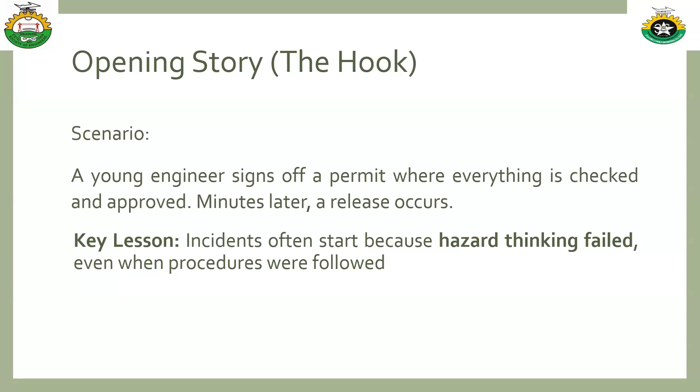So the objective of today's section: generally we'll be talking about distinguishing the difference between process safety and personal safety. We'll also talk about how to identify hazard in the real world system. We would also be training ourselves on how to apply basic hazard techniques like HAZOP, bow tie, and also adopt the mindset of a safety professional.

Most times, most of us believe safety is not everybody's business. Some people believe safety is just about the safety professionals themselves. I want us to know that today we are going to differentiate between personal and process safety, and master the bow tie mindset, and look at why some of the biggest names in the industry still suffered catastrophic failure. Some people believe anything about safety is only for safety professionals alone.

But truth be told, everybody has to take ownership. So we need to move from the stage where we think we are just complying with safety, to now talking about the ownership of safety.

So at the end of this section, I want us to be able to think like a risk engineer, and we should be able to identify hidden hazard, apply systemic analysis tools, and prevent catastrophic failures. And I believe, hopefully, all things being equal, that by the end of this training you will leave here with only one thing: for you to start thinking in hazard. So hope you are ready for me.

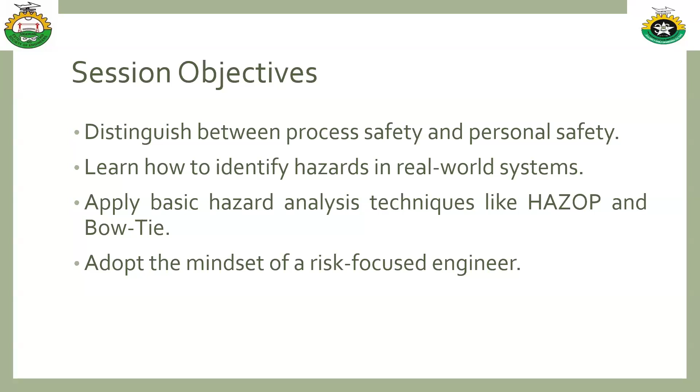So let's start with what is process safety. Process safety is not about slip and trip. Most times when we're talking about hazard, most people think safety is all about slip, trip and fall, work at height, hazard of trip and fall, fall of objects from height. Those are not just safety when we talk about process safety. Majorly, those are personal safety. So process safety is not about slip and trips.

It is about catastrophe, low frequency events that destroy facilities and lives. Unlike personal safety, where we talk majorly about slip, trip, PPE, those are not applicable when we're talking about process safety. Process safety talks more about system failure, equipment design, engineering control. Process safety focuses on catastrophic and low frequency events, because zero injury doesn't mean safety.

Most of us believe that so far there's no injury, if you carry out the job and nobody got injured, then we are all safe. No, you might not be safe if your process safety is not in place, because at the end of everything, you might have zero injury and still have a case of people sitting on a very big disaster.

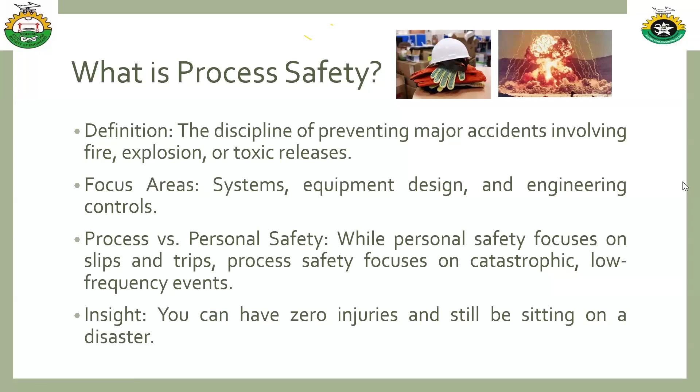But it's because there had been an error in your design. That is the reason why that happened, because you've not put in place systems or alarms that can help you to monitor when there is high temperature, or when there is thermal runaway. So all these things are what we are talking about when it comes to process safety.

So the difference between process and personal safety: personal safety is talking about you personally, but process safety is talking about the process. A very good example is someone cooking jollof rice. If you are cooking jollof rice, what you are thinking about when it comes to personal safety is how you personally will get hurt. Can you get burned when you are cooking? Can you have cuts when you are slicing? Those are personal safety.

But when we're talking about process safety, we are looking inward. What could happen to the gas cooker and the gas cylinder, is it corrosive? What systems are in place, or emergency buttons, or emergency controls in place in case there is a gas leakage? Those are when we are talking about process and not just personal safety. Personal safety is thinking about cut hazards when using a knife, ejection hazards, and all those things. That's when you're talking about personal. But in terms of process, you are looking inward into the process of how that thing is being done, for you to be able to identify what could go wrong.

And if you could work more on process safety, the chances of a hazard or an accident occurring are always very, very slim. So now this leads us to defining hazard and risks. This takes us to defining hazard and risk. Am I still audible, please?

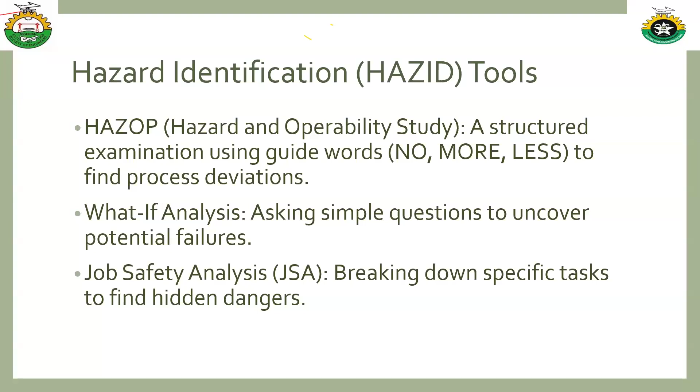Even though HAZOP uses some guide words, which we'll be talking about in the next slide. So HAZOP generally stands for hazard and operability studies. It is a structured, systematic, and team-based technique used to identify potential hazard and operability problems in a process plant, system, or procedure before they cause an incident.

So generally, what HAZOP is trying to achieve is for you to be able to look inward. It is a technique for you to identify potential hazards that will affect the process, the system. And majorly, I overheard the NSE Ikeja chairman speaking about safety in design. So HAZOP starts from the planning stage, even before you start the installation project, you need to carry out your HAZOP.

HAZOP was developed by the Imperial Chemical Industries in the 1960s and has since become the gold standard for process hazard analysis across the energy, chemical, oil and gas, and pharmaceutical industries.

I want us to know the core philosophy behind HAZOP, because even though it is simple, it is very, very powerful. Most accidents don't happen because people are careless. They happen because something in the process deviated, and that is what HAZOP is going to be teaching us, because HAZOP speaks more to deviations.

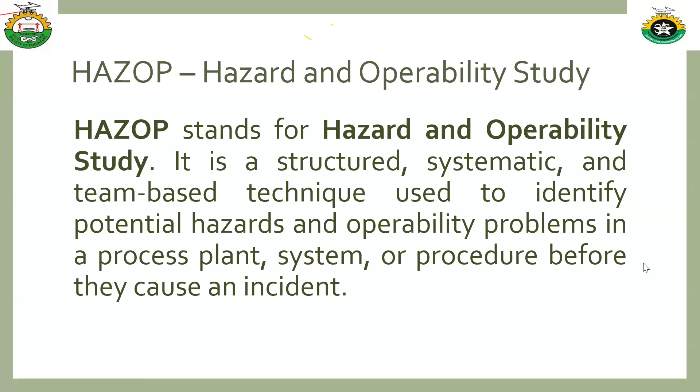Knowing this, HAZOP forces a team to systematically ask: what if this process doesn't behave exactly as designed? So that is the question we ask ourselves. What if this process doesn't go the way we plan to design it? Because you might be planning how you plan to design and execute it, but by the end of everything, at the execution stage, it ends up failing.

Now we are getting there. So how do we conduct HAZOP? The question is, when is a HAZOP conducted? HAZOP is typically carried out at these 5 stages.

Number 1, the first stage HAZOP is carried out is during the design stage, that is before the plant is built at all. During this period, when you are still in the planning stage, you try to identify and eliminate the hazard as early as possible. Trust me, the cheapest way of fixing or eliminating a hazard is during the design stage. This is not only applicable to those of us in the oil and gas sector, or in the process and manufacturing sector, it's also applicable to those in the construction sector.

That is why we talk about safety in design. In the course of designing, you should start thinking about how to eliminate hazards during execution, while you are designing your project or designing the building. That is why a lot of people end up losing a lot of funds, because they didn't put safety in design into place. They didn't think about what they could do in case of maintenance, or how they would manage it in case of maintenance. At the end of everything, they start destroying walls, breaking things, which costs them more because they didn't put all this in place during the design stage.

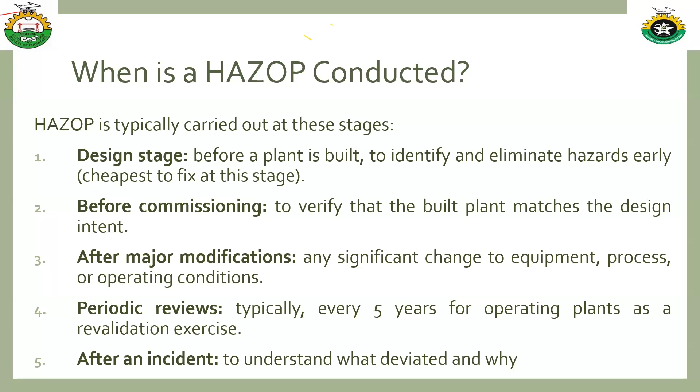So how do we build the building blocks of HAZOP? Many people have heard me using words like design intent, deviation, and so on. I want us to understand that in HAZOP, you must understand 3 key fundamental concepts. Number 1: design intent - that is the intention of the design, what you want that design to achieve.

The design - why was that thing designed? What do you want that design to look like? The picture of what the design wants to look like. It's just like someone who wants to build a house - that's what an architect does. An architect will first build a caricature model of the house, a 3D, 4D, or 5D model depending on the technology they're using. That is the design intent - how you want the building to be after it has been fully constructed.

So this is what the process is supposed to be - this is what you intend the design to be. Now, for example, pump 101: you want it to transfer liquid from tank A to reactor B at a flow rate. Look at the watchword.

You are designing a pump, and you want that pump to be able to flow at the rate of 15 meter cube per hour, at the pressure of 2 bar. That is the rate you want the liquid to be transferred. So the design intent is the baseline, the foundation of what you want to construct, the foundation of what you want to do. In ISO, we call it scope. That is the scope of what you want it to cover, scope of what you want that thing to do. So design intent is what you want it to aim, what you want that thing to be like.

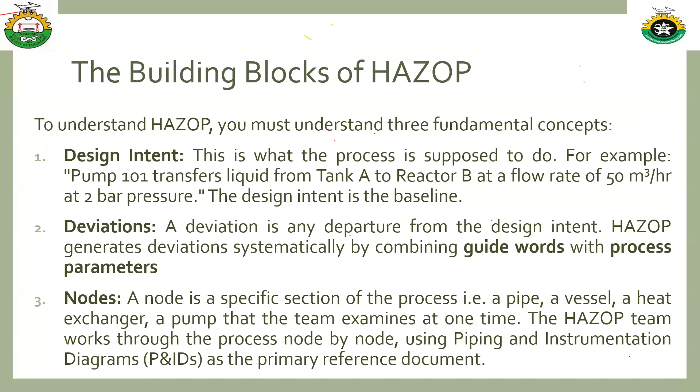Now, for instance, let's assume at the end of the design, the pressure is now higher than the 50 meter cube per hour at 2 bar pressure that we planned. So we'll be hearing more pressure, right? That is now more. Let's assume it is lower, less pressure, that is, it is now below what we planned to design initially, as well as something additional is present, that is, there is a contamination.

As well as part of, reverse, other than — we have a lot of guide words like that, but these are the standard guide words that we'll be using in the course of this training.

So common process parameters include flow, pressure, temperature, level, composition, viscosity, reaction, pH, time, speed, voltage, and signal.

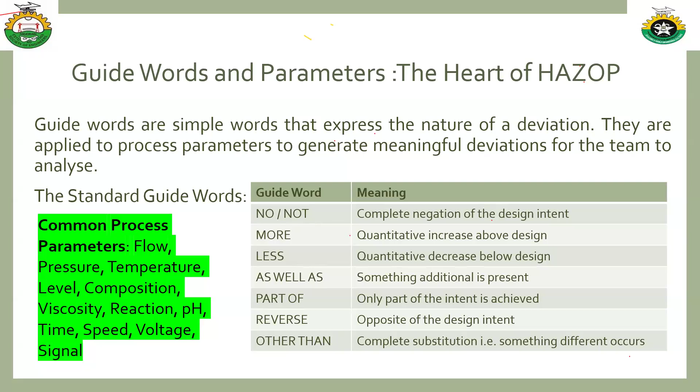Now, how do we combine these guide words? For the combination of the guide words and parameter, you take a guide word and apply it to each parameter. Now look at this — I was saying something earlier about the example of 50 meter cube per hour at 2 bar pressure, which I mentioned earlier. Now look at this guide word.

More plus flow means high flow. I mentioned nodes earlier — a node can be a pipe, a vessel, and so on. So let's assume the node we're analyzing is a pipeline. You get what I'm trying to say? Then we'll say, okay, more flow in the pipeline — it means high flow rate in the pipeline. That is the design intent. The flow is now above the flow we projected in the design intent.

No flow means no flow at all — that is, the pump has failed or the valve has been closed. Less temperature, low temperature in the reactor. Reverse flow, that is, there's a backflow into the upstream vessel. Now, for the reverse flow, the node we are using here is what? Vessel.

Now I want us to do something so that we'll understand very well. More flow, high flow rate in the pipeline — so what is the guide word? What is the parameter? What is the node we are using here? I'll call someone randomly.

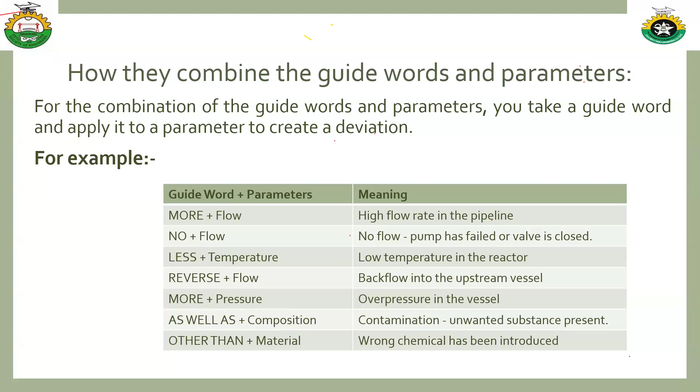That is, you are trying to check if that existing safeguard is sufficient for the risks you've identified. Then if the risk is not acceptable with the existing safeguard, you start thinking of what additional control measures you can put in place.

So every finding, after you've identified your deviations, analyzed the risks, identified what causes the deviation, the consequences, the safeguards you've put in place, the risk rating, the recommendations and the action, you now put it in your worksheet, which is always in tabular form, so every finding you've gotten will be recorded in a structured worksheet.

This is the backbone of the HAZOP study. A typical HAZOP worksheet has this column: it has the column for node. I think you all understand how to identify the node.

It has the column for parameter, when I was talking about flow, pressure, temperature, viscosity, and so on. It also has the column for guide word: no, more, less, as well as, and so on and so forth.

It has the column for deviation. When we say more flow, that is high flow; more pressure, that is over pressure or high pressure. Do you get? That is the deviation. It has the column for deviation.

It has the column for causes — this is when you start analyzing what caused that deviation. It also has the column for consequences: what are the consequences if these deviations are not being managed?

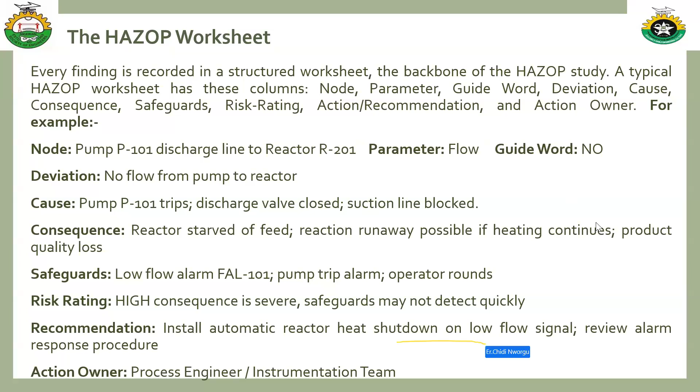So we move on to the next phase, which is talking about the simple hazard thinking model. I mentioned earlier that we have different types of hazard tools, and one of them is the what-if analysis. The what-if analysis is one of the simple hazard thinking models, and I believe engineers should consistently ask these three questions. What are the questions?

The questions are: what can go wrong? What are the consequences? And what control exists? What can go wrong? What are the consequences? And what control exists?

When we're talking about what can go wrong, that is what can happen, you understand? What are the consequences? We are talking about what will happen next, when the thing that we project to happen has happened. So what is going to happen next? That is the consequences. And when we talk about the control, what are the things that can stop it?

What are the things that can stop it? Like the example I gave, when someone is driving at high speed, what can go wrong? I can lose control. Do you understand what I'm trying to say? That is, I can lose control.

And with the look of things, what can go wrong? In the course of losing control, my brake can fail. So what are the consequences of that brake failing? Do you get? There can be even fatality, that is, the person who is driving can die. So what are the control measures that we put in place? That is when we're talking about the airbag and the seat belt.

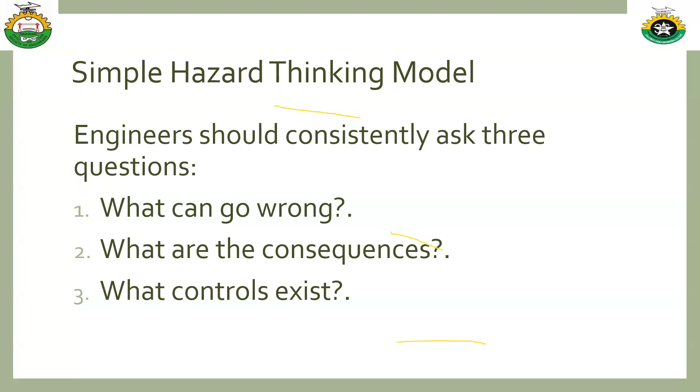So note, if you ask these three questions consistently, you will prevent most incidents. I repeat, if you ask these three questions consistently, you will prevent most incidents.

So now let's go to hierarchy of control. This one I want us to always know: the hierarchy of control plays a major role in our planning stage. It plays a major role whenever we are using any of our hazard identification tools. And most especially, the best of it all is to always ensure we use elimination — we should try as much as possible to see if we can remove the hazard completely.

So engineers must apply controls in this order of effectiveness. The best of it all, when you design a solution, always remember the hierarchy of control. Number one, elimination — removing the hazard entirely. Substitution — replacing a hazardous material with a safer one.

Engineering control — using relief valves or shutdown systems to redesign the flow, to stop the flow, or to put a stop to what failed. Those are the engineering controls. Administrative controls, speaking to the procedures and the training. The PPE, which is always the last line of defense and not the first.

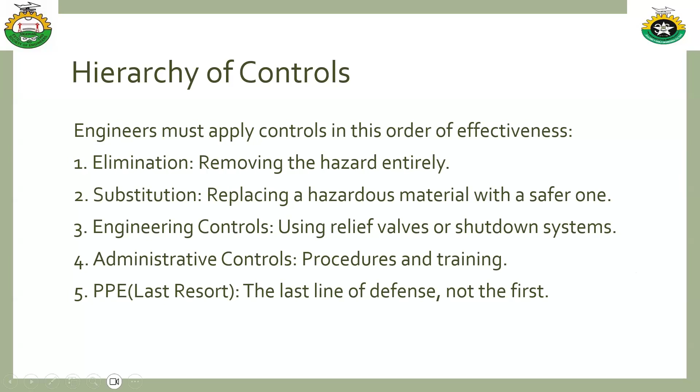Now let's go to this scenario. A contractor needs to perform welding hot work within 15 meters of a live gas pipeline. Now, this is the task, the classwork, all of us want to do now, based on the knowledge of the hierarchy of control I just finished talking about. So let's rank these controls from the most effective to the least effective.

Number one, providing the welder with a fire retardant suit. Number two, using a continuous gas detector. Number three, shutting down and purging the line. And number four, signing a hot work permit.

Now let's line it up according to rank, from the most effective to the least effective. I'll be in the chat box watching out for the correct order. So which is the most effective to the least effective? Yeah, great, I can see someone already getting it. I need more responses, please.

I've even given you the answer in front by putting the hierarchy in front of it. Yeah, good. Anybody that doesn't get it right, you are wrong.

So the most effective is 3, shutting down and purging the line, followed by 2, using a continuous gas detector, followed by 4, signing a hot work permit, and followed by the last, providing the welder with a fire retardant suit. So always remember that PPE is the last resort, and we should always ensure we follow elimination. That is why I even wrote the hierarchy in front of it, to make it easier.

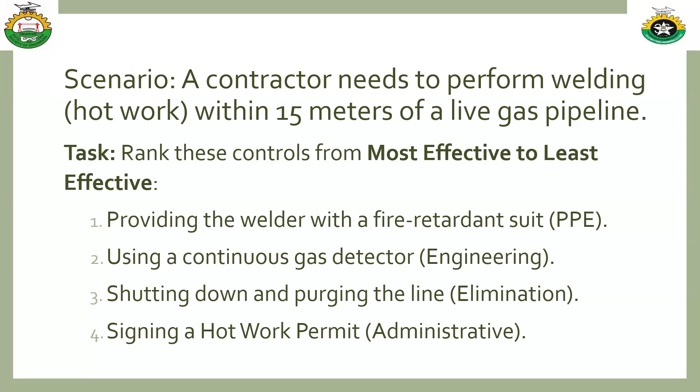Now let's start the exercise for the day. So we are getting there gradually. Case study number one.

So now this is a case study. Let's use a Nigerian context, a pipeline incident. In Nigeria, we see this recurring pattern, often where small hazards escalate because they are silent risks. This is the scenario: a pipeline developed a small leak due to corrosion that was initially ignored because it seemed minor.

If you are looking at it, it is minor, nothing serious. Then the leak eventually resulted in a vapor cloud that found an ignition source, leading to a massive explosion. Now, looking at this case study, there's a sequence to this event, and the sequence of the event is as a result of a small leak which was initially ignored.

That is, the person identified a small leak, and when this person identified it, the person still ignored it. So that shows there is a failed inspection program. Because the moment you carry out an inspection and identify something, and you still don't do the needful to ensure it's closed out immediately, that's the major issue most safety professionals and engineers have. We only do inspection for record keeping, just to show we've done our deliverable, but we fail to follow up to ensure the needed control measures and closeouts are done, which makes us fail.

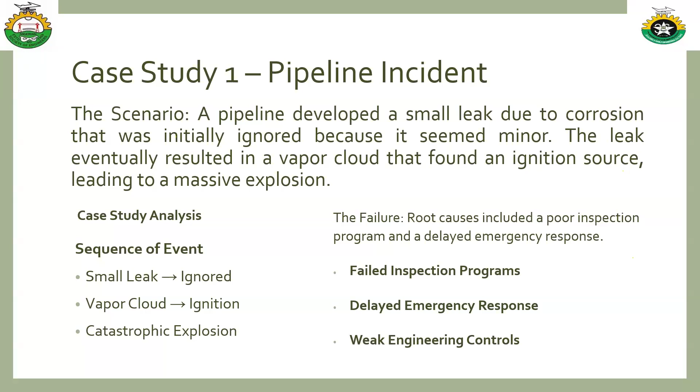Small leaks are ignored because they seem minor, but a leak creates a vapor cloud, and this finds a source of ignition. These incidents don't escalate suddenly; they grow quietly because of poor inspection and delayed action. So I want us to note today that early reporting saves lives, and not just reporting alone, but also ensuring you follow through to close out all that you identify in the course of the inspection.

Now, this is another case study: the Texas City Refinery incident that happened in 2005. At Texas City, 15 people died because of a tower that was overfilled. The reason they died is as a result of level indicators that failed and alarm systems that were ignored. The system failed at the engineering control level because they discharged flammable liquid into an open drum instead of a flare system. This is a classic example of a low frequency, high consequence event.

Now let's look at this event closely. You will see there is an engineering failure because the system relied on a weak engineering control and suffered from deferred maintenance and poor safety culture. As I earlier said, this had resulted in a lot of catastrophic events, and that is why the major disaster happened—because of system design and communication.

Now I want us to ask ourselves this question: what would you have done differently as a process engineer on duty? Please write your answers in the chat box.

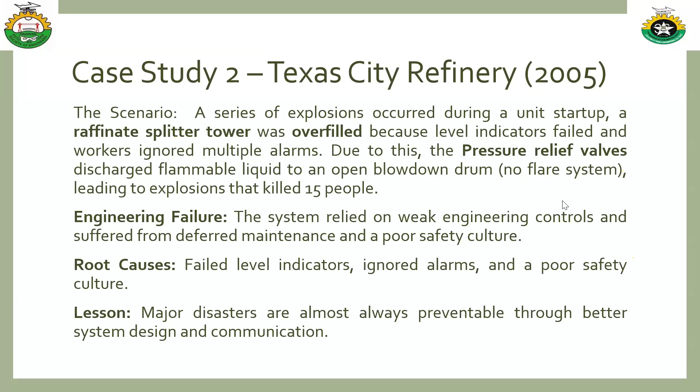Now I want us to do this—hope the class is not getting boring already. I want us to do this: if it's getting boring, please just say yes. Don't be shy, always speak up. Just say yes. Is it getting boring? Type yes.

Hello? I think I'm the only one in class who said yes. Okay, thank you, Mr. Kayode. Thank you so much. Thank God, Mr. David Alabi—it's not getting boring. Thank you so much. Hello, can you hear me? Yeah, I can hear you.

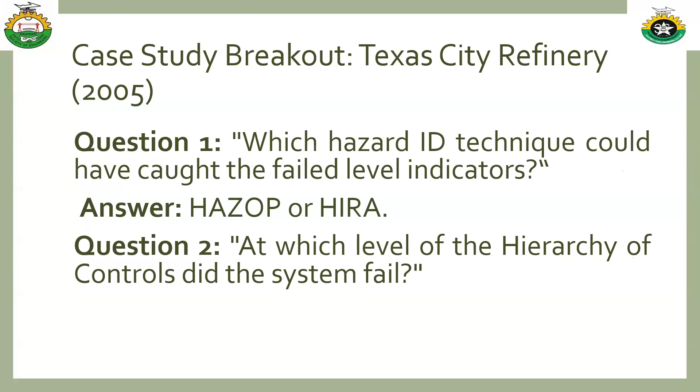At which level? Wow, I love that. Mr. Julius Olabisi, correct. User, correct. Mr. Thankgod, correct. Ejiro, correct. Engineer David Alabi, correct. Everybody's correct. So it failed at the engineering control stage, and the reason is because they used an open blow down drum instead of a flare system. So we are all right.

Now let's go to case study 3. Everybody must know about this popular incident, the Piper Alpha platform incident that happened in 1988, which is one of the most massive fire incidents and explosions on a North Sea platform, resulting in 167 deaths.

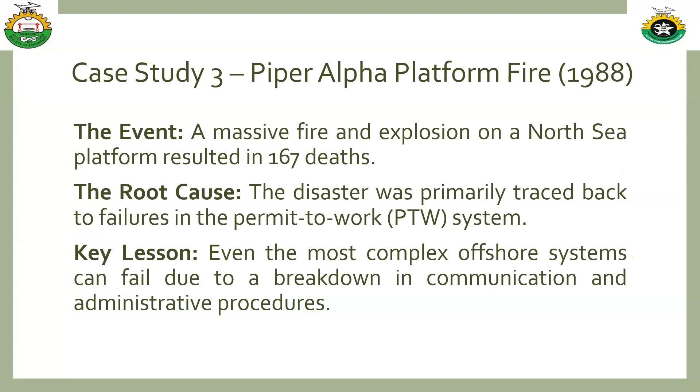I won't be diving too much into it, but I just want us to know that in this incident, which most of us know about, the root cause was primarily traced back to failure in the permit to work system. Even the most complex offshore systems can fail due to a breakdown in communication and administrative control. So it is very important we take systems and communication very, very seriously, because communication really matters in the course of this.

So another one, this one is very common when we talk about process safety issues: maintenance valve failure. A lot of people experience this. If you are in the process safety space, oil and gas space, you will have seen this maintenance valve failure. In this scenario, an incorrect valve alignment occurred during routine maintenance, which led to an unexpected pressure buildup and resulted in a catastrophic rupture. So the lesson learned, generally, if you look at the word, is an incorrect valve alignment.

So for them to have had an incorrect valve alignment, it was as a result of human error. Human error is predictable, and therefore systems must be designed to be error-proof whenever possible, because human error is possible.

That is why we have interlock safeguards in some machines, because they know that because of human error, we can mistakenly slide our hand into the rotating part of the machine. So in the course of the design, it was put into consideration that there could be human error. That's why we have safeguards in most of our machines today.

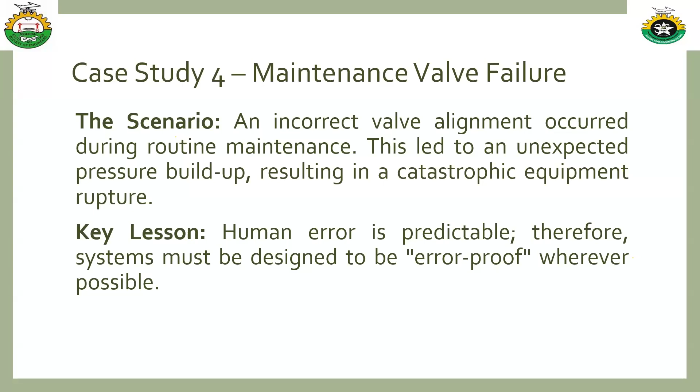So this takes us to the next topic: human factors in engineering. Some of us overlook it, and that is why we see that most workers, when under pressure, end up having issues when under fatigue. I believe some companies have put into consideration what we call the shift system, whereby they run shifts.

Maybe you work for so many hours, another set takes over, running the shift system so it can reduce fatigue and give time for people to rest, most especially if the company needs to run round the clock to meet their production targets. So we as humans, because we are not robots - even our cars, which are machines too, run through wear and tear.

They even end up packing up after some time if the maintenance culture is very poor. So due to this, what mistakes can happen? That's what you'll be thinking in terms of human factors in engineering. And part of it is fatigue, pressure to perform.

Complacency is another very major one. When we talk about behavioral-based safety, people believe in it - I've been doing it now. You even see some people telling you, even before they gave birth to you, this is how we've been doing it, and nothing has happened. I know it, over-sabi - let me use that word, over-sabi. They believe it is how we've been doing it and nothing has happened.

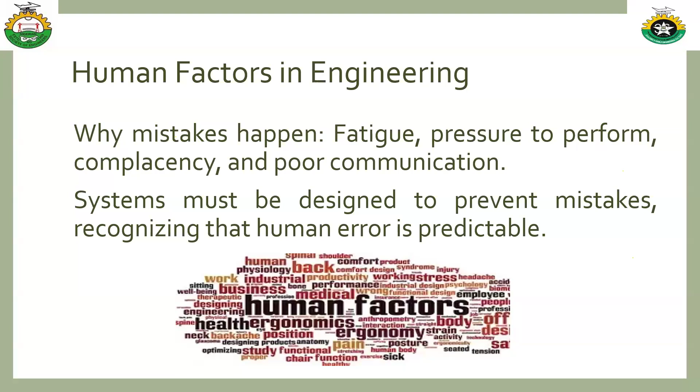Your systems must be error-proof because people will always make mistakes. Now, class exercise. Let's go to the chat box. A fuel storage tank scenario.

Class exercise, scenario number 1. You are inspecting a standard fuel storage tank during a high temperature afternoon. Identify 5 hidden hazards. Let's go to the chat box and see people's response. So what are the hidden hazards you can see while inspecting a standard fuel storage tank? Okay, high temperature.

Okay, explosion, heat hazard. Fire, explosion, overflow. Good, let's see more. Static electricity. Wow, a round of applause for you, a standing ovation. High temperature, pressure buildup. Exposure to fumes.

Heat exhaustion, dehydration, fatigue. Now look at what Mr. Emmanuel is doing there. When we talk about process safety, I mentioned there's a difference between personal safety and process safety. So heat exhaustion, dehydration, fatigue all speak more to personal safety, while fire, explosion, overflow speak to process safety. Do you get that, Mr. Emmanuel? Can you unmute and confirm you understand? So, ergonomic hazard, explosive atmosphere - a lot of wonderful responses.

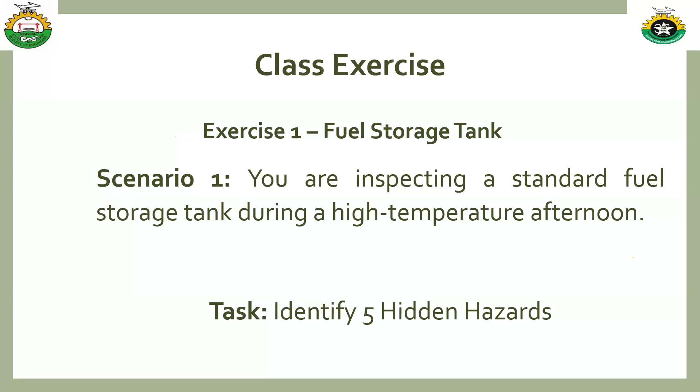So please, let's always understand the difference between process hazards and personal hazards. Do you get it? So let me help you out. Now, this is it.

One, overpressure during filling or due to temperature changes. Two, leakage, loss of containment from seals or valves, static electricity during fuel transfer, fire explosion risks from nearby ignition sources, and predictable human error, which is overfilling. A round of applause to everybody who responded in the chat box, thank you so much. I want us to always challenge ourselves to look beyond the obvious. So you as an engineer, you should always look beyond what?

The obvious. Stop looking at personal safety alone. Be looking into the system, be looking into process safety, because a good engineer sees hazards. Look at what I'm about to say: a good engineer sees hazards, a great engineer sees the hidden one.

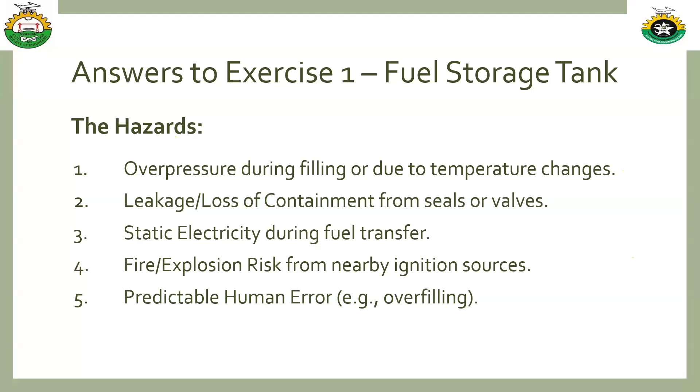So as it is, all of you are right. Different answers: overpressure from heat, static electricity during transfer, seal leak, fire risks from nearby grass, maintenance, human error during level check, and so on. A round of applause to everyone. Let's go for another exercise. Look at this exercise.

Now, a team is performing welding, hot work, near a live hydrocarbon pipeline. Look at that word, live hydrocarbon pipeline. What can go wrong? Monitor that keyword, near a live hydrocarbon pipeline. What can go wrong, and what controls are needed? Let's see our answers in the chat box.

What can go wrong? Good, I've been seeing wonderful answers. Isolate, explosion control, isolate leakages - thank you so much, Madam Engineer Nimat. Leakages, explosion, heat transfer, catastrophic. For those I'm not mentioning your name, please I'm sorry, I'm just trying to scroll as fast as I can, but everybody is dropping amazing answers. Thank you for making this class interactive, you did not dump me alone to just be talking like a radio. Vapor gas, lockout for isolation, engineering control, fire can happen. Everybody has very wonderful and amazing answers.

So now, a team is performing welding job, hot work, near a live hydrocarbon pipeline. That is a pipeline that probably has gas flowing through it, or petrol product or crude oil flowing through it. It can even be welding of a pipeline. So what can go wrong and what controls can be put in place?

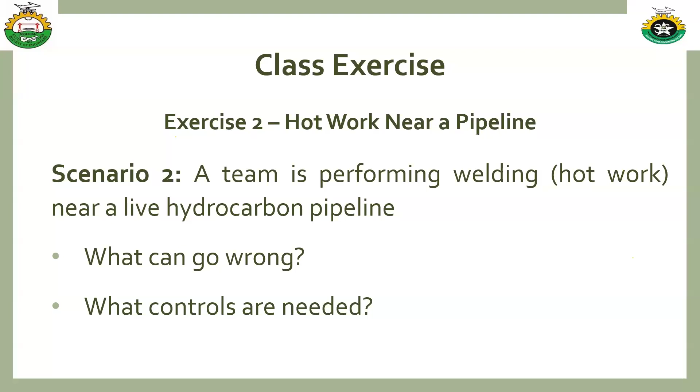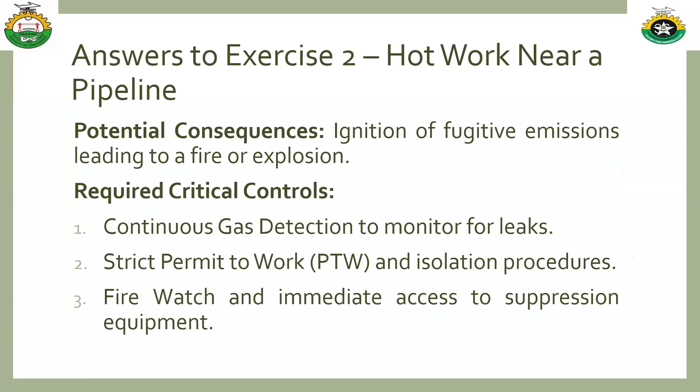So let me unveil my answers. Potential consequences: ignition of fugitive emissions leading to fire or explosion. And it also requires critical control measures: continuous gas detection to monitor leaks - this is to monitor if there is a leak of any flammable gas from the live pipeline - strict permits to work, isolation procedure, fire watch should be in place, and immediate access to suppression equipment. I want you to know that no matter what job you're carrying out, always ensure you have multiple layers of control, which is often required for high risk work. And when thinking of control measures, always exploit and reinforce the use of hierarchy of controls, starting from elimination till we get to the last resort.

Now this takes us to the bow tie model. Are we ready? If you are ready for the bow tie model, say yes.

If you are ready for bow tie model, say yes. Now we are getting there. If you are ready for bow tie model, say yes. You are good, yeah good. I'm getting the yes, let the yes keep coming please. Yes, good, so thank you so much.

So when we're talking about bow tie model, this is another model that we use. We've talked about HAZOP, we talked about what-if analysis, and now we are on bow tie model. Bow tie generally speaks to a visual tool showing the relationship between threats, events, and consequences. When we talk about threats, these are causes leading to the event—what are the things that can result in that event? Those are what we call threats, the things that can result to the events we projected.

Now, for instance, let me give a very good example, like one we used earlier, when there was a small leak. That small leak is a threat, but the top event is the leak itself. The leak can be as a result of a corrosive pipeline—maybe the pipeline has rusted, it's already corrosive. So that's the threat which resulted in the leak. You understand what I'm trying to say?

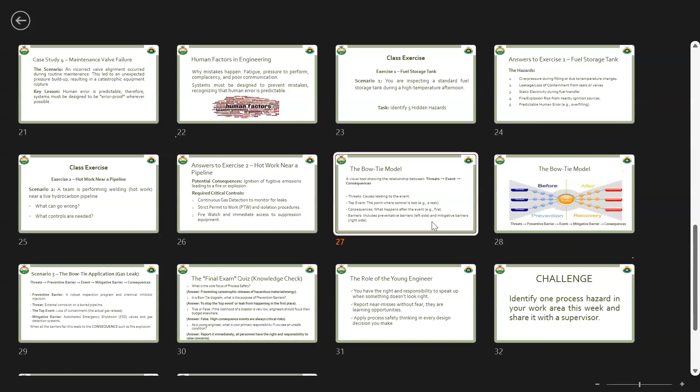The prevention barriers will be—okay, let me give an instance. Can you give an imaginary view? Like, look at threats. Sorry. Are you still seeing my screen, please? Hello? Yes, I can see. Good, yes, we can see your screen.

Now, can you see the bow tie model that I'm projecting now? Yes. Now see where my cursor is—this is the threat. Let's assume the threat is the corrosion I mentioned earlier, that the pipeline is corrosive. Now the top event is the one at the center here, and the consequences are here. So between this threat and the top event, you will always put a preventive barrier. The barrier you're putting in place is to make sure this threat doesn't end up turning into this top event. And in the case where this top event does end up happening, you would also put a barrier here to stop that top event so the consequences don't end up happening.

Now, a very good example: the threat now is a corrosive pipeline, there's corrosion. You put some preventive measures to prevent the corrosive pipeline from leading to a top event, which is leaking. Do you get what I'm trying to say? And that leaking is what will end up leading to that vapor clouding and so on. Since you know there's a tendency that when this thing is corrosive it can result in leaking of the hydrocarbon or gas, you now put another mitigative barrier here. This barrier is saying, okay, let's even now assume there is leaking—how can we quickly arrest that leaking so it won't turn into catastrophic events, which is the consequence: fire, consequence, explosion.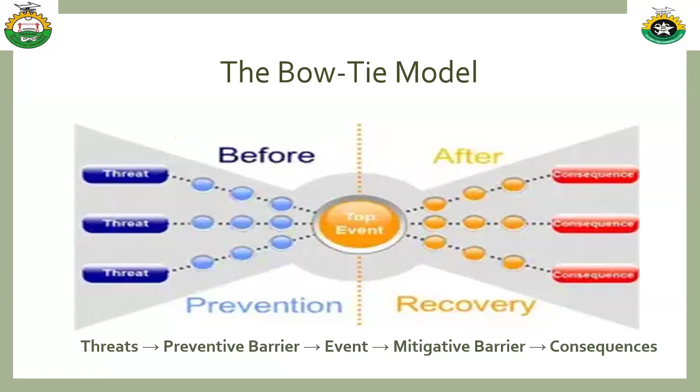Thank you so much. So I want us to know, okay, let's do a live case scenario with this bowtie analysis that we've learned now. Look at this bowtie analysis. So for a gas leak, what do you get?

Now the threat for a gas leak is external corrosion on a buried pipeline. So since you've identified the threat, what will you now be thinking of? What are the preventive barriers to prevent this external corrosion of a buried pipeline from leading to actual gas release, actual gas leakage?

So the preventive barrier now is a robust inspection program and chemical inhibitor injection. The robust inspection program is to know if that pipeline is still good, if it needs to be changed, or if it just needs to be welded. Do you understand what I'm trying to say? So a robust inspection program helps you identify the necessary control measures to solve the corrosiveness of that buried pipeline, or injection of chemical inhibitors.

So now, what is the event that we're projecting? That is loss of containment. That is, by the time the pipeline is corroded, over time it might not be able to contain the gas anymore. And at the end of everything, there might be a vapor or gas leakage, which ends up leading to ignition, like the example I gave earlier.

So then, mitigative barrier: what is the mitigative barrier we can use when there is gas leakage? Automated emergency shutdown. That is, if there's a gas leakage, an automated emergency shutdown valve immediately detects the gas and automatically shuts down the process. Do you get the flow of the gas? And we have the gas detection system in place, so by the time that is put in place, it will prevent the leak from leading to the consequences, which are always fire, explosion.

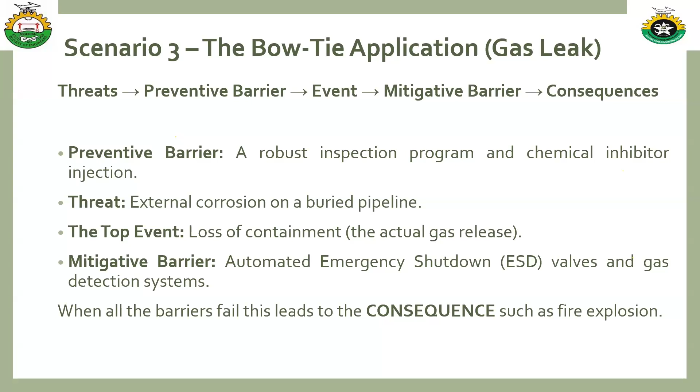So now the final quiz. Sorry that the quiz is getting too much, but that is the assignment Engineer Luaton gave to me. She categorically said she doesn't want it to be a theory, she wants it to be something relatable and practical. Even though I'm not sure if I'm meeting up with the assignment, but after my presentation, I think she will decide if I try or not. So the final exam quiz.

So this is the question. Now go to the chat box. What is the core focus of process safety? Waiting for answers.

Yeah, good, to prevent catastrophic events. I've gotten my answers already. To prevent major events, to prevent the release of hazardous chemical. Yeah, it's still catastrophic events. Preventive approach, proactive prevention of a hazard. Yes, wonderful, to prevent deadly events leading to explosion. Sorry, Engineer Abel, don't write to limit catastrophic, to prevent it, don't limit it at all. Prevent it, eliminate it, remove it. To prevent major accidents, to prevent loss of... yeah, good, good, good, good.

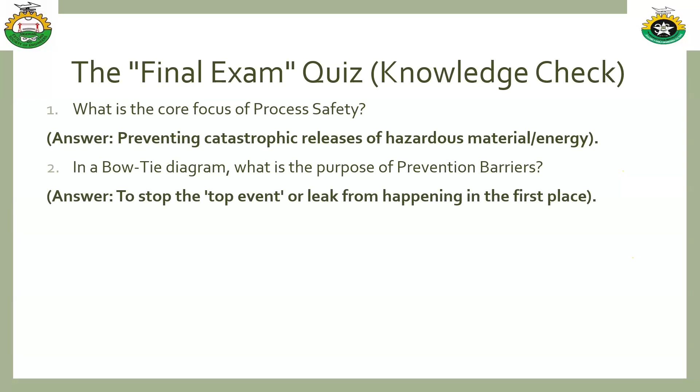So another question for us. True or false? If the likelihood of a disaster is very low, engineers should focus their budget elsewhere. True or false?

Again, let me start saying false, false, false. Haba, nobody's supporting me. True. False, false, false. If I tell you everybody who chooses false is wrong, Uncle, will you believe me? But anyway, the correct answer is what? It is false. A round of applause for everybody. False. So again, let's check the right answer.

So, yeah, false. High consequence events are always critical risks. So that was why I explained using the car and aeroplane as an example earlier in the program.

So now the last question. As a young engineer, what is your primary responsibility if you see an unsafe condition?

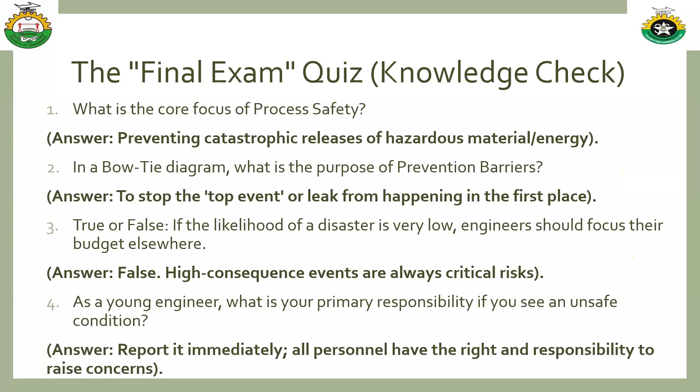Stop the work and report immediately. Thank you. So the answer, again, is report it immediately. All personnel have the right and responsibility to raise concerns. So now let me emphasize more on the roles and responsibility of the young engineers. This is our role as a young engineer: you have the right and the responsibility to speak up when something doesn't look right. You have the right and responsibility to report near misses without fear, and they are learning opportunities.

Let me make you understand. Near miss, the higher or the more the near misses that are being reported, the more positive the safety culture becomes. Because when people can speak up and report more near misses, there's a higher chance that you get to learn and quickly put in necessary control measures.

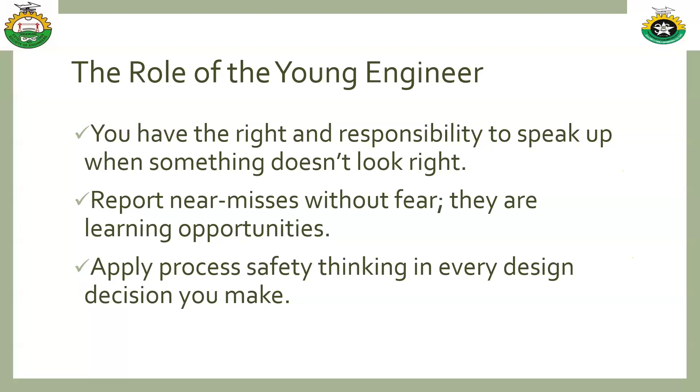As a young engineer, always ensure you apply process safety thinking in every design decision you make. Let's start thinking about process safety and elevate beyond only personal safety. We should start thinking about the process - what can go wrong? So now I'm challenging you all to identify one process hazard in your workplace this week and share it with your supervisor.

So on a final note, hazards are everywhere. Small issues can escalate into disasters. I want us to know that small issues matter, as they can result in big disasters.

I want us to start thinking about systems. And for heaven's sake, always speak up early. If something doesn't look right, it probably isn't.

Most incidents don't happen because we don't know safety. They happen because we stop thinking about hazards.

So on a final note, I'm going to leave you all with this: you are not just an engineer, you are risk managers. Note, your decisions save lives.